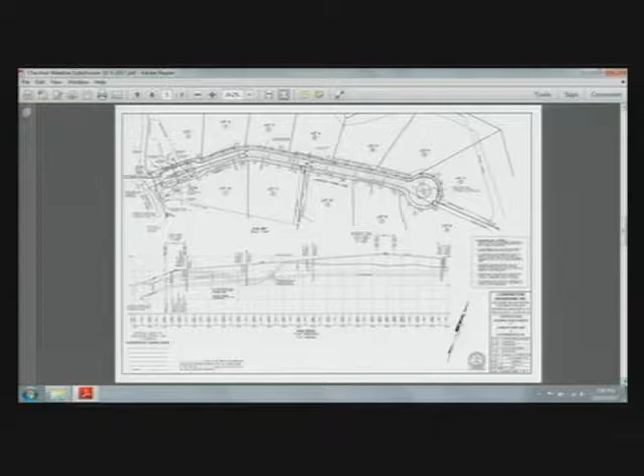And on the sheet in the back set of the plans, there is a detail of the construction of a rain garden. And that will be found in the lower right-hand corner on sheet 6 of 6. Additionally, there was an email from DPW sometime during Thursday of last week. I was away, and I got it this morning when I got in. Relative to some landscaping, I've authored a letter that indicates that we believe we comply with the recommendations or questions.

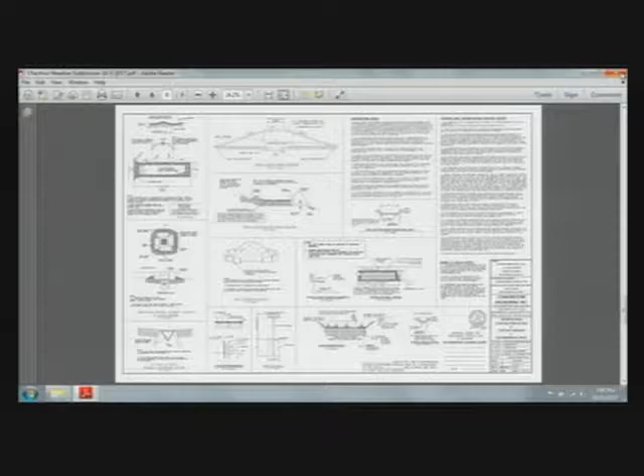There was one that dealt with the use of Acer rubrum, red maple. However, that's listed in your guidelines, which I think are about 50 or 60 pages long, for acceptable trees. We have also indicated on the plans, there was some question with respect to the design of the reconstruction and widening of Chestnut Hill Road for that last leg. We have separate plans for roadway intersection improvements on our set of plans. They're not part of this, as we've all discussed.

So at some point in time, the selectmen will be given those plans that we're working on now, along with the traffic improvements and traffic controls during construction, and they would be the ones to approve it. So your approval, if there was an approval on this, would be conditional on the selectmen approving the access or some sort of a funding mechanism to repair any damage that may be to the first leg of Chestnut from Route 30 into the site.

There were some questions about the replacement of a type of tree in the island, which is a very small width island at the very beginning. The landscape architect had chosen dogwood. In your listing of approvable trees are crab apples and things like that, but the decision was to not use those because the crab apples fall in the road and deal with slippery conditions and unsightly conditions.

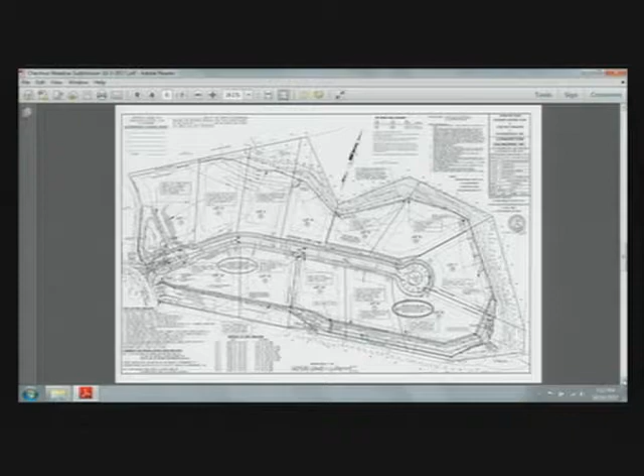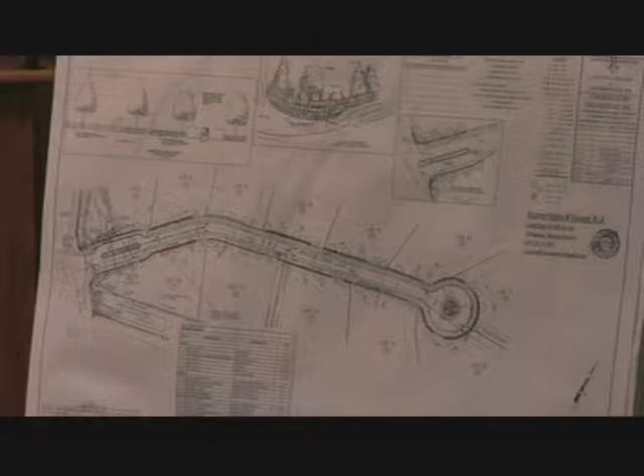But at the end of the cul-de-sac, there's a drainage easement that goes down the lot line. I don't know, does this point to that? There you are. Those trees are each outside of the easement. And then at the area in the front where there's some pipes crossing the road, those particular pipes are generally deep enough for the root system. And when they do plant, that's a 40-scale plan. When they do plant them, they're not going to put them in front of inlets or anything like that.

So we suggest that we've answered those questions and concerns with respect to placement of trees in the areas where utilities will be. The water pipe runs down the first leg of the road in the pavement, so that wouldn't be an issue. And then, of course, the utilities are going to run down, and they're going to be outside of that area that would be impacted by those particular plantings. So I can respond to questions and comments and suggestions at this particular point in time.

Thank you. Mr. Jenks? Good evening, George. You've done a calculation, I think it was in connection with lots 5 and 6 and the addition of the rain gardens. Calculation I'm not familiar with, and I wonder if you could just help me. You took the square footage, multiplied that by an inch, and then divided by a foot to come up with cubic feet. Is that a, I'm just not familiar with that. Is that a common way of converting, or I guess you're not converting, you're getting from square footage to cubic?

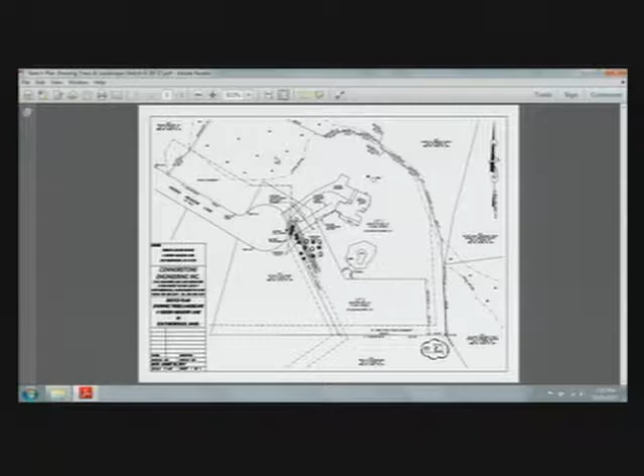Thank you. I'll ask the town planner to give us an update on actions that she's been involved with. Since the last planning board meeting on September 25th, where you presented your application for modification to definitive subdivision that was approved, we provided you with some information from prior meetings that you had requested. I think there were 2 things I sent you. It's just not coming to mind. But they were informational about things that happened in the past during the discussions that you weren't here for.

This one or the other matter that we discussed today? It could be the other one. It was the other one that we just discussed. I'm confused because we talked about both. The other was the Killam Farm. That's correct. For the benefit of the rest of the board, there was nothing else on this. Sorry, a lot on the plate. Like there's new news I don't know about.

No. So we did provide town counsel with the case that you had given us at the last meeting. Okay. And in that, we got some feedback, and I'll let Don talk about that. This afternoon, I received a phone call from town counsel regarding this, and as we stated in previous meetings, you come here, you're always welcome. Proponents are always welcome to bring their attorneys or the clergy or others.

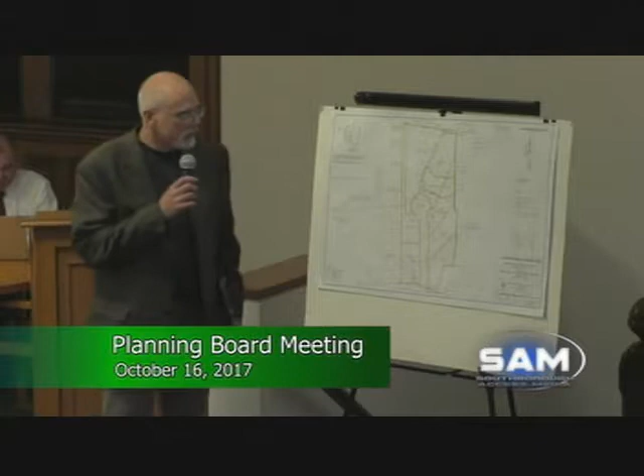What we have before you is a 6.1 acre parcel at 28 Boston Road. There is an existing home on this property, 28, located here in the lower right. To the west of that property is the Roman Catholic Church. Walker Street is the rear portion of that property here. And our lot is shown here in this outer orange, so I'm just going to follow up the line to see what that boundary is.

You have lots that back up to Walker Street. Then you've got lots that are on East Main. Comes back across, you have lots that are on Thayer. Coming back along again, this is the open space as part of Thayer. And then we've got one property here to our east, LeBarry is the property here. And this is our conventional plan. Starting with that because that's what we get by right.

We've opted to file with you special permits for a flexible development, for a lower impact development, and for a major site plan review. We would also need to file with the Board of Health for our project, and we'll also need to file with Conservation for a stormwater permit. We have already filed for the stormwater permit, and we will be filing with the Board of Health.

So to outline, what the flexible development requires is that you have to show a conventional plan. So what I have before you is a 7-lot conventional plan. We're going to go backwards, I guess, with 7. Lot 7 does encapsulate the existing house. Lot 6 is in this configuration. We've got 4 here crossing the wetland. We would have a common driveway that would be allowed to get to Lot 4. We've got Lot 3, 2, and 1 with our right-of-way. And we're using about 30,000 square feet to form the roadway with this conventional plan.

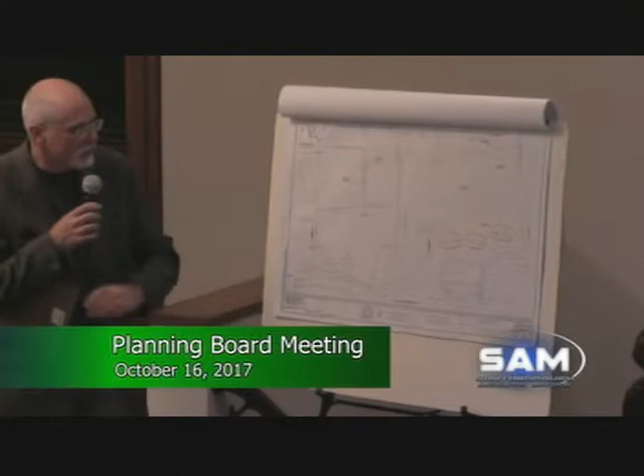The footprints of each of those are the same. We have a common driveway that will gain access to those units. The entry would be here, so it's a one-way travel flow going in a counterclockwise direction with exit here. And we are proposing a retaining wall along the front of Boston Road. I'll show you a little bit more detail on that in the next plan.

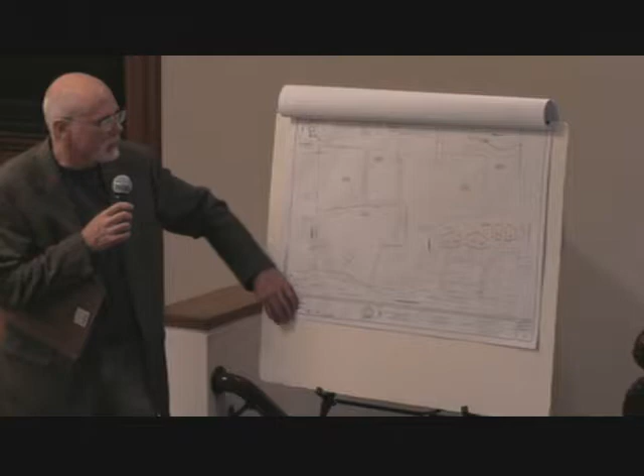We've got soil testing that we've conducted out on the site, where we've got a distribution for our septic system, and then we had additional testing for some of our stormwater management systems that were closer to each of the residential units. On our grading and drainage view, which is the view to the left in your sheet set, you can see we have stormwater management located here on the right side of our driveway, located in the front of units 5 and 6, units 3 and 4, units 1 and 2, and then to our west along our exit driveway here. Again, there's the retaining wall that's being proposed.

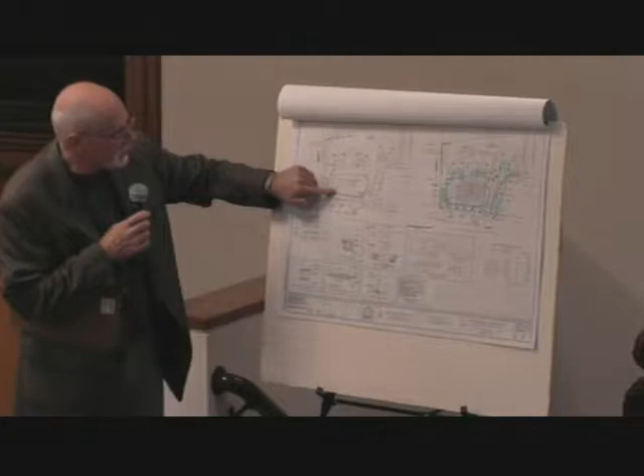Our soil absorption system would be located behind that retaining wall. And we've got landscaping that we're proposing along our perimeter. We've got an evergreen screen that's going to be located here to the west along the Roman Catholic Church, to our east along the LeBarry property, and we've got street trees along Boston Road.

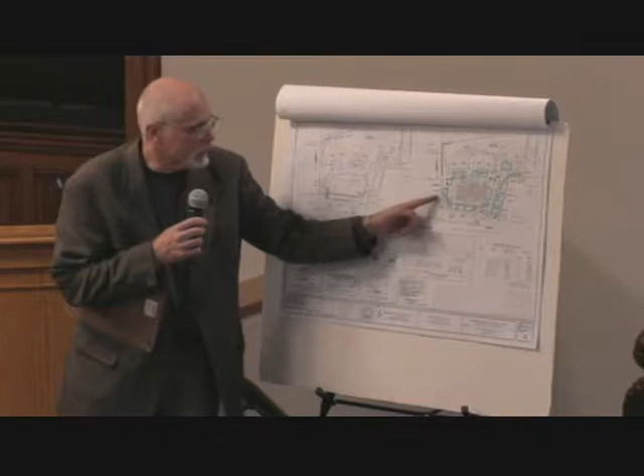The details for the stormwater management system, we've got flow diffusers that'll be located in all of these leaching areas. That detail is located here. The retaining wall is located in the middle of the sheet. We've got a construction entrance apron that's located on our exit driveway. There's an existing paved driveway there that we would utilize during our initial construction, and then we would revert back to a construction entrance apron as we get our area ready for future pavement.

Our pavement details are here. We've got a concrete Cape Cod berm located along our perimeter of our paving limits. Sedimentation erosion control methods and procedures are outlined here.

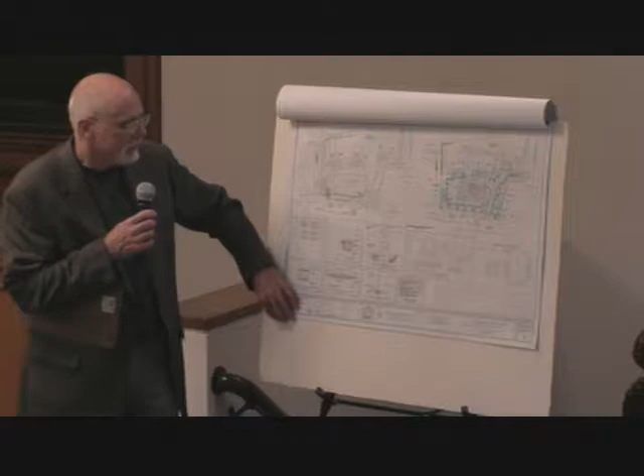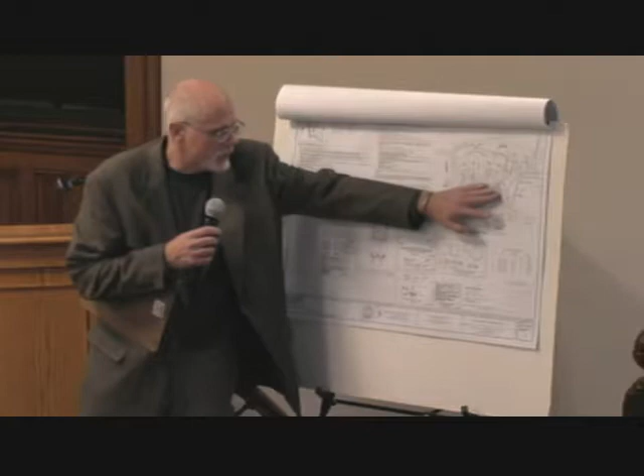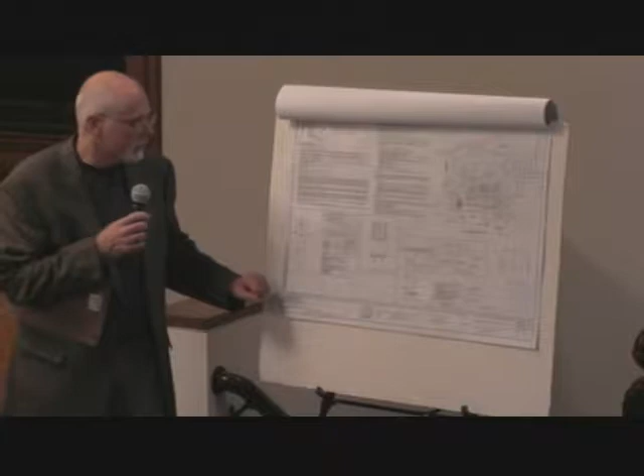We have a standalone sheet 1 of 1, which is our stormwater management plan. This is a SWPPP basically, with an outline of the operation and maintenance during construction, and then our post-construction requirements, because we need to maintain all of these infiltrative drainage systems. Many of the details that you saw on the previous plan are repeated on this plan, because it's basically a standalone plan for that permit that we'll be obtaining through the Conservation Commission and our NPDES permit from the federal government.

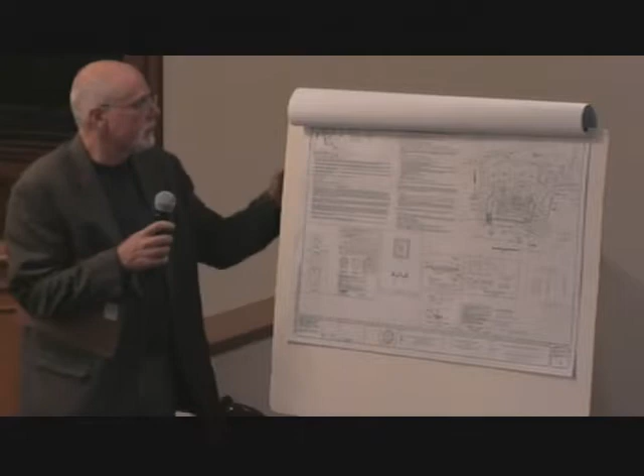So as we stated in our application, again, we have our 3 permits that we're seeking from you, 2 special permits and the major site plan review. We have development on basically an acre of land that's going to be affected, where we have a 3.5 acre set aside and then an acre donated to the Roman Catholic Church. The alternative would be to develop a 7-lot subdivision, which would be basically affecting the entire 6 acres of property. Our preference is obviously for the flexible development, and we look forward to your support on that.

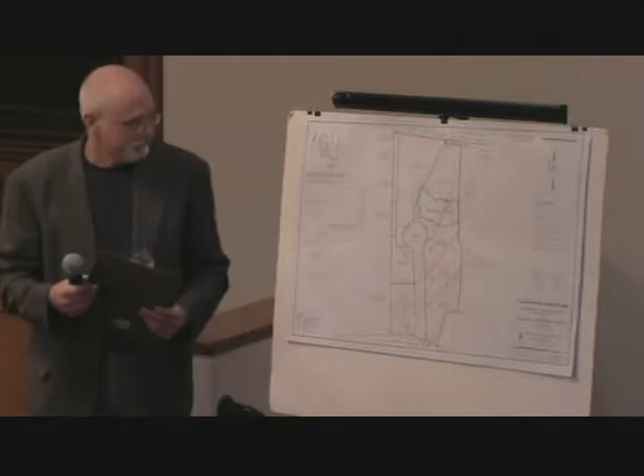Thank you. Thank you. Very good presentation, Mr. Bemis. Open it up to the board. Mrs. Luttrell. Mixing things up here, going first.

So the conventional plan, well, first of all, I want to say I like the plan in general. I like the clustering of buildings and all in the small lot up front in the big open space parcel. But the conventional plan is based on the entire site, yet the flexible plan is only based on 5.5 acres of the site. So either the conventional plan has to be based on 5.5 acres, or the flexible plan has to be on the whole site.

We could set aside and just make it 4.5 acres and not donate any land to the church. We saw it as an opportunity to pursue a flexible plan, but then also use the ability to do this project, denoting that we have a 7-lot subdivision versus a 6-unit set aside. We really only have to max with 6 units. So we're basically taking out one of those lots, if you will, and giving it to the church. That's how we're doing the math.

I don't disagree with your assessment. I look forward to being able to still continue to donate land to the church, but if we can't, then we'll just have to table that option, because this is our conventional plan. And you can see that the land in question does affect a portion of our road. I'm not going to disagree with you. But the goal here was to minimize footprint and maximize opportunity for abutters.

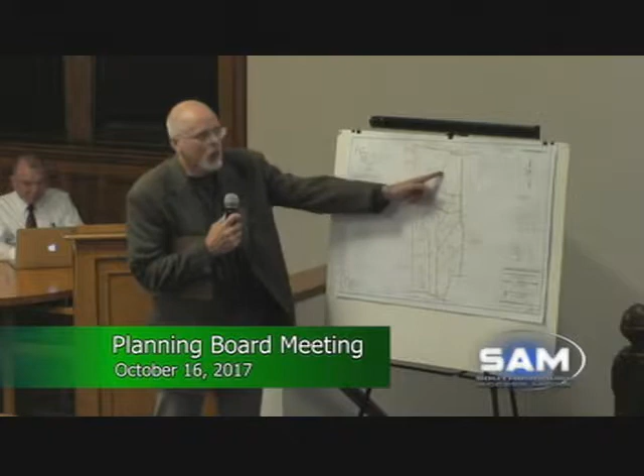So these 2 lots are allowed by right. You can have 2 lots that are accessed over a common driveway by right, as this subdivision would be by right. We're not showing you something that needs special approval. It's a 7-lot conventional subdivision allowed by right. The minimum lot area is 25,000 square feet and 125 feet of frontage. And many of these lots exceed that.

Right, but it has to meet the requirements of subdivision and conservation and Board of Health. Yep, and we believe we would comply with them all. So you'd be able to put a house with the septic setback up there? In this area, sure. And on the other one down there? Mhm. So the open space is based on the 5.5 acres, not the whole site. So you're short on open space.

Again, with the donation of land to the church. So if we don't recognize that as having a value commensurate with the set aside of the open space, then... I don't disagree. We felt that had a very high value, to be able to assist an abutter by providing them an acre of land. We thought that was a very important feature to offer in this development. If we're not allowed to do it, then, because I think there are provisions in there that give you that latitude. You as the board collectively have the authority to do this. But if you feel as a collective you can't support that, then I'm fine with it.

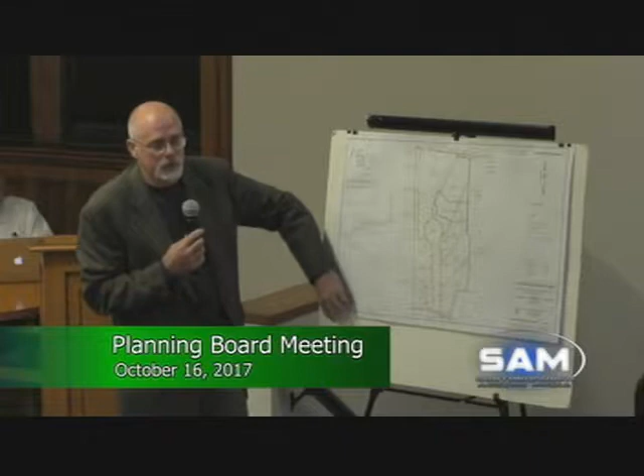I'm personally not prepared to speak to it. If someone's here that wants to, I will, or I'd be prepared in the future to address that and give you something in writing. You can see, if you look at that plan when I started, where their building is, right on that boundary. It makes perfect sense for them to have some adjacent land so that they have the freedom to try to do something else with their property.

And we're not discouraging that. We're actually trying to encourage them to have the opportunity to reuse their property and find a better way of possibly accessing it and using it. So this is on Route 30. Have you had any interface with MassDOT?

This section of the road, I don't believe, is restricted with Mass Highway as far as regulatory on the curb cuts. I did speak with the Department of Public Works about it, and I've spoken to Fire about it as far as access. How many cars? We think we'd probably be adding 12 cars, I assume.

I would say that's easy as far as the traffic demand, but this section of Boston Road, you've got good sight distance in both directions, and having the one-way travel flow in and out of the site makes it pretty efficient as far as seeing cars along that stretch of road. I'm certainly not going to change the dynamic of Boston Road one bit. Mr. Jenks, would you run through again the discussion about the ANR?

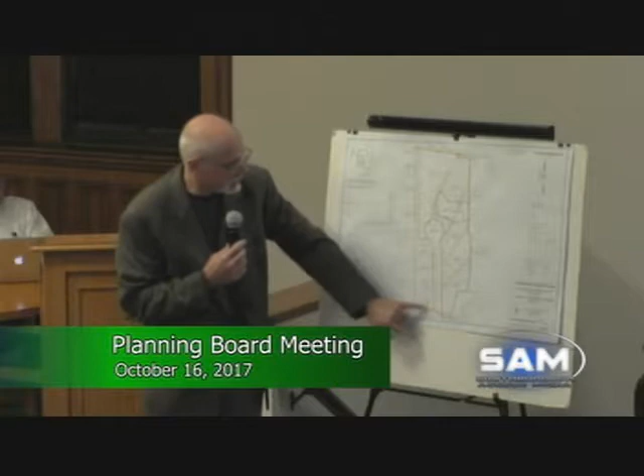Well, we know we need to create a plan of land for this property, because currently what exists, actually, I'll start with this, would be the outer boundary of the orange line. That's what exists today. There's actually a single lot when they subdivided it, so 28 stands on its own as well within that. So from my perspective, I would want to define what my permits are applicable to.

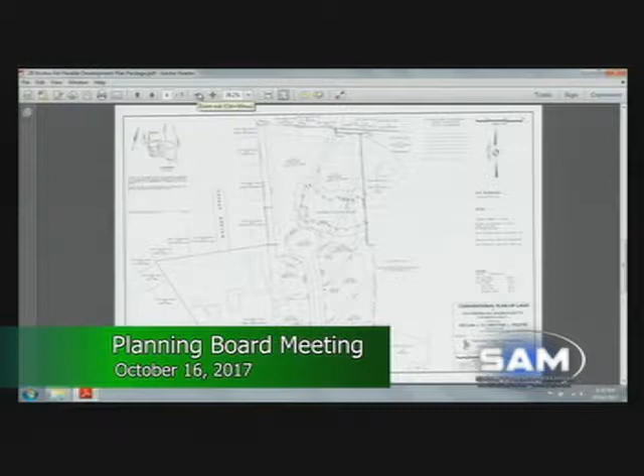Now, you could apply it to the two deeds that Mr. Poutre has, because he has what he purchased from the Donahue family when he purchased the property, and then he has what he purchased from the Catholic Church for the wedge here. So we have two pieces of property, and from my perspective, I wanted to get them all contained on one lot that I was going to define.

So that's the thought that I had, that we could provide you with an approval not required plan, creating Lot 1, defining what its open space limit is, and Parcel A, which could be conveyed out if we get that far.

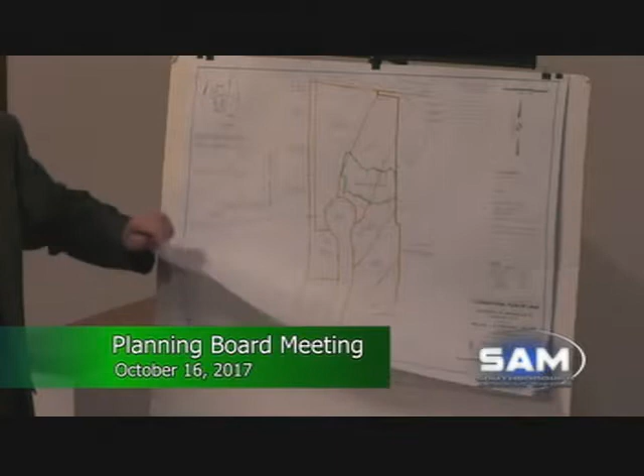Because clearly, if I have to show all of this as being my conventional plan, and I'm just developing one less lot, and it could be that I just do a 6-lot development with this plan, and I could still give the church a wedge of land, but it won't be 1 acre at the end of the day. Because I'm not trying to get 7 units here, I'm only trying to get 6.

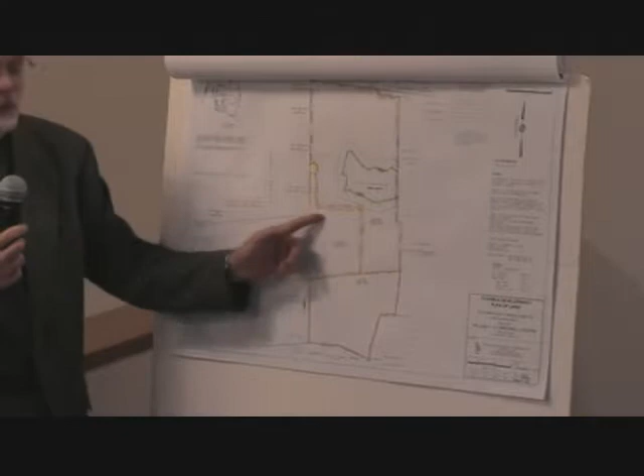So the idea was that the major residential development, you need to show how many units you can get conventionally, and then you can do the flexible. So we would have the ability to give the Catholic Church some land, but probably not what I've configured here as Parcel A. You have 2 lots now. I do have 2 lots described now, in separate deeds. In separate deeds, yeah.

Each of the 2 have the required frontage on Boston Road. One has frontage on Boston Road, but not a required frontage. The other one does. Well, the other lot does, right. Both current lots that I have deeds to. Right. We went through an ANR process here, and each of those lots. But Bill, there's a matter, you don't have a deed, you have a deed. You have a plan of land on record and you have a deed. Right. But I'm saying to you, you've not deeded this.

There are 2 deeded; he has not deeded himself the entire piece as 1 unit. Okay, we do have an approval not required plan that shows 28 standing on its own and the other piece as 2 separate lots today. But what I was getting at was, when you're going back in the title for the deeds, we have the deed that came in from the church for this small wedge of land, and we have what we acquired from Donahue. And we have a few plans of land. But when you reference it, you're going to reference the deed. You're not going to reference the plan. That's the point that I was making.

So what I was suggesting was that we would be able to correct this by putting on a plan of record, having that described, and we would have what we were going to give to the church described and could be of record. Then when the permits come in, it's referencing that deed. That's the only point that I was making. So I didn't mean to correct my client, but I just wanted to be clear that there's a deed for the small wedge and there's a deed for the larger piece, but no new deeds have been conveyed.

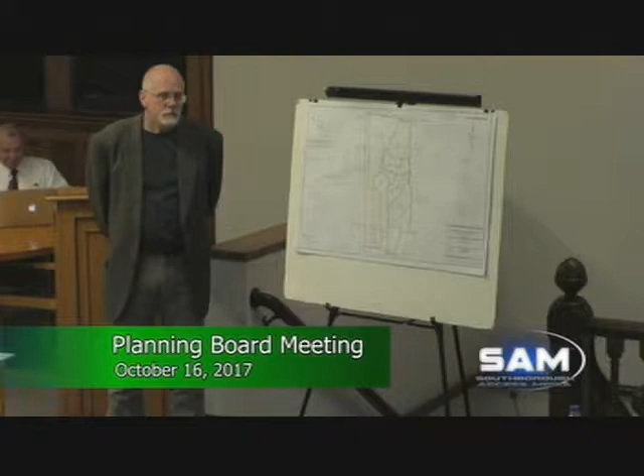I'll join in with the others who have spoken and say the concept is certainly one that I can support. We just need to figure out the details. And the neighbor down in the southeast corner, have you spoken with them? I have not spoken with them. We did send out notifications to everybody within the required area. And you haven't heard from them? I have not.

Peter, the drainage system, you showed six blocks, I think. There's actually seven. So I can go through that. Yeah, so each of these two units would have their roof water being infiltrated into this zone. This unit is infiltrated into this zone, and these two units into this zone.

Then there is a Stormceptor system, so it's picking up that stormwater that's coming off of the surface of the pavement that's here, that goes into this system, and there's one on this side that goes into this system. All of it would come down and tie into the closed drainage system of Boston Road.

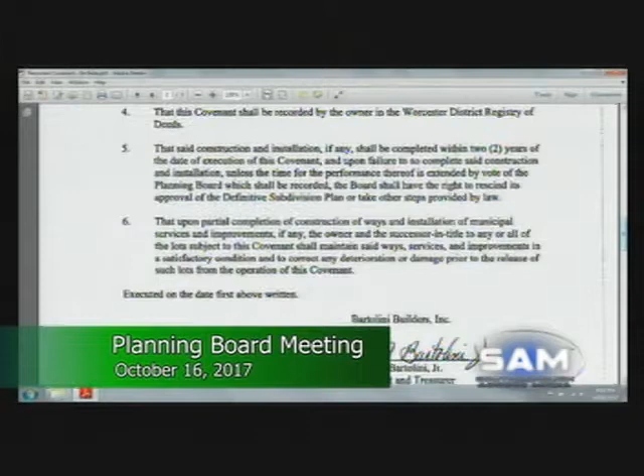He's gonna need to have that notarized. Next item on the agenda, Stonebrook Village Covenant. Excuse me, Mr. Chairman. As I'm an abutter to this project, I'm going to recuse myself from my position on the planning board, but after speaking with the Ethics Commission today, they said that I could speak as an individual, as I'm an abutter. Thank you.

Daniel, good evening. Good evening. We'll just finish up with this other item and then we'll get started. Go sign, maybe. We'll cross it out. Yes. I'll ask her to, so she can get it beforehand.

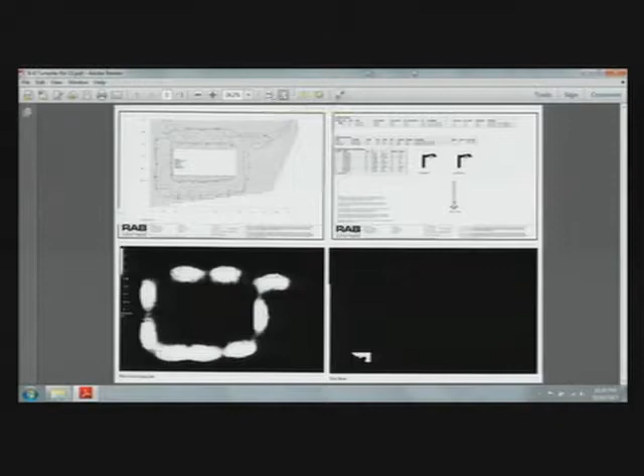Karina? I looked through the electrical site plan, and I don't see any evidence of lighting indicated on the building itself. I look at the light shed plan for foot candles, and I don't see any higher foot candles around the building other than what the parking lighting portrayed. So when you look along the foot candles, if there were lights incorporated into this lighting plan, there should be a little spike at each one of these wall packs, or whatever they put on their perimeter building lighting. I didn't find any. Not wall packs. I didn't find any details of any types of other lighting.

I did find on a floor plan in the electrical set, electrical lighting plans, there's some indication right here. So the parking lights were approved around the perimeter of the parking lot. Then there were 2 wall-mounted, building-mounted lights for signs. Some kind of hook-shaped light was approved in the decision as well. And I'm not sure if this footprint of the building, this floor plan with the electrical, is what this indicates. I didn't have enough time to look at it. But again, the decision just says X amount of lights in the parking lot and 2 sign lights on each side of the building, or on each part of the front.